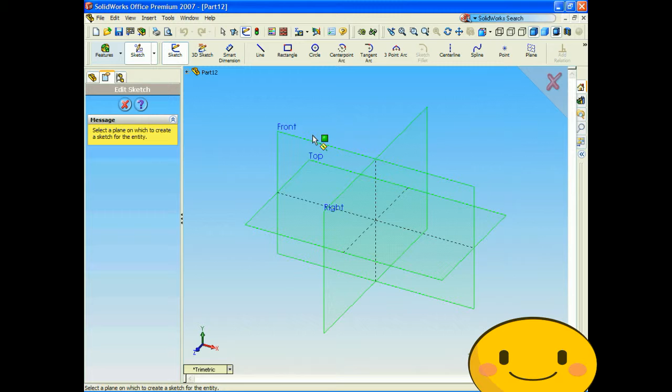To start off, let's click Sketch, click Circle, click the front plane. Now click the origin and let's draw a circle and make this 30 millimeters the radius. Click enter, accept it, click OK. Now go into your isometric view

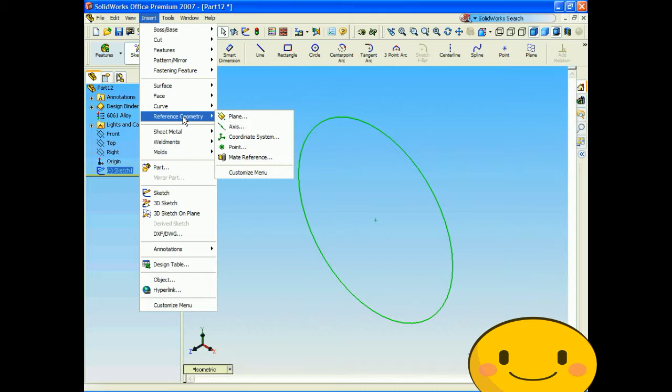and let's insert a plane. Now open up the tree and click the front plane, and let's make this 30 millimeters from the front plane. Click OK.

Click front view, so now we can see the other circle. Click circle, and we can make our next circle with respect to the first one that we've made. Click the origin, and let's make this circle 20 millimeters. Click OK, click OK. Let's go back to our isometric view,

and let's make another plane. Click plane. Now we're going to make it from the first plane that we've made now. So click plane 1, and let's make this one 60 millimeters from plane 1. Click OK, click front view.

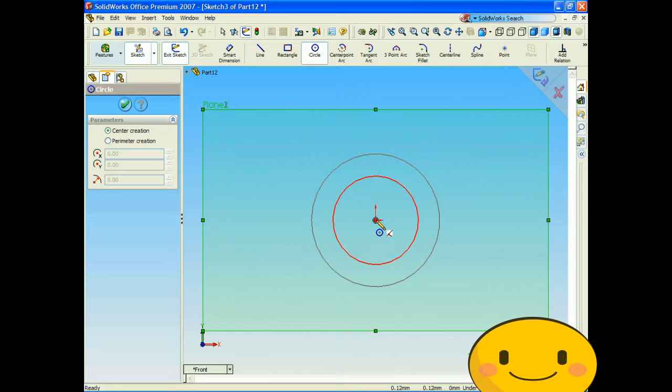Click circle, click the origin, and let's make this circle as big as the first circle that we made. So once the sketch goes red, we are making it as big as that other sketch. Click OK, click OK.

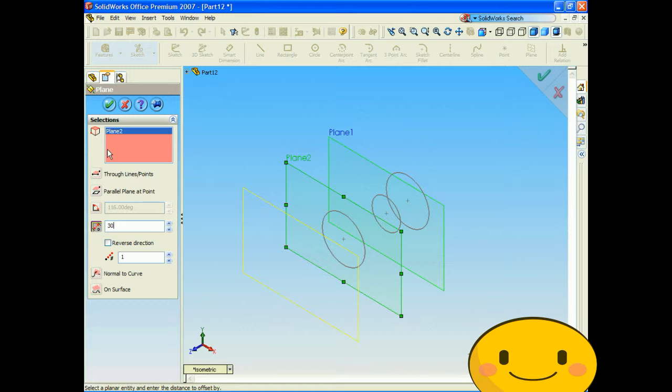Go back to your isometric view, and let's insert another reference geometry. Click plane. Click plane 2. And this one, let's make it 30 millimeters. Click OK.

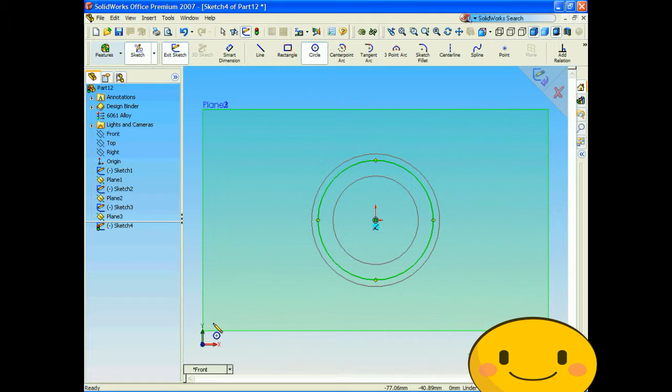Click front view, click circle. Click the origin, and this circle we'll make in between these two, let's make it 27 millimeters. Click enter, click OK. Now back to our isometric view.

Insert reference geometry, click plane, click plane 3. And let's make this 50 millimeters. Click OK, click front.

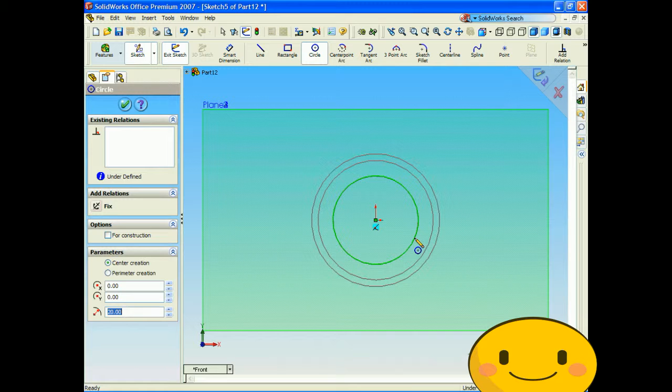Now let's draw this circle from the origin and make it as big as the smallest circle. Click OK. Back to our isometric view.

Insert reference geometry, click plane, click plane 4, and we'll make this one 40 millimeters from plane 4. Click OK, click front view.

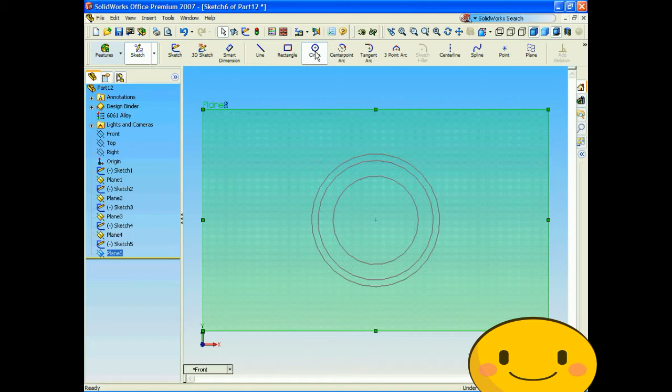Click circle, click the origin, and let's make this 10 millimeters. Click OK, click isometric view.

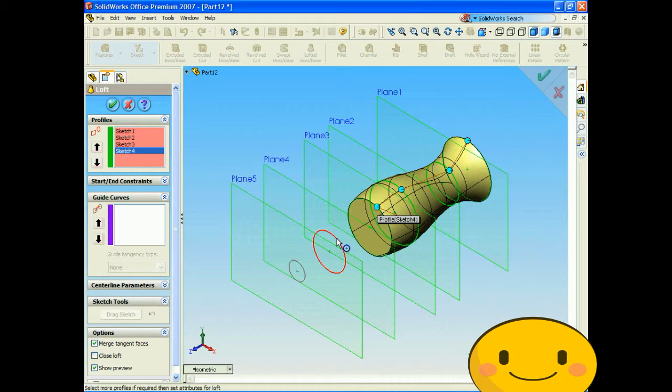And now let's use our lofted base. So click every single sketch that we made, and you'll see the whole part taking shape. Now let's look at our object.

Looks like what we wanted it to be. So let's click OK, and now we've created our little lava lamp. And once again, we can go through all the sketches that are highlighted in red, and we can edit them.

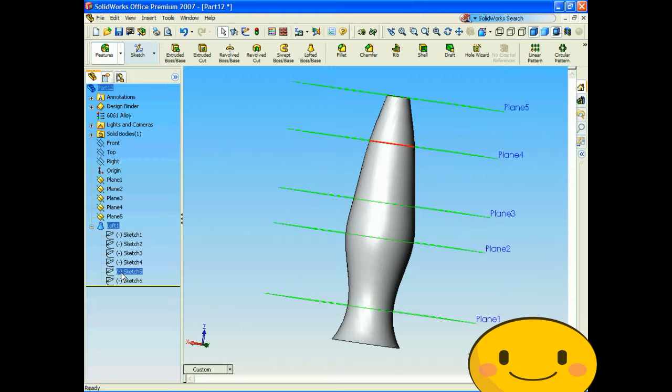So let's say we wanted it to come to more of a point at the top. Let's edit sketch 5 and sketch 6. Right click sketch 5, click edit sketch, click the smart dimensioning tool, and let's make this smaller.

Let's make this 30. Click OK, and let's edit. Click OK, and it rebuilds it.

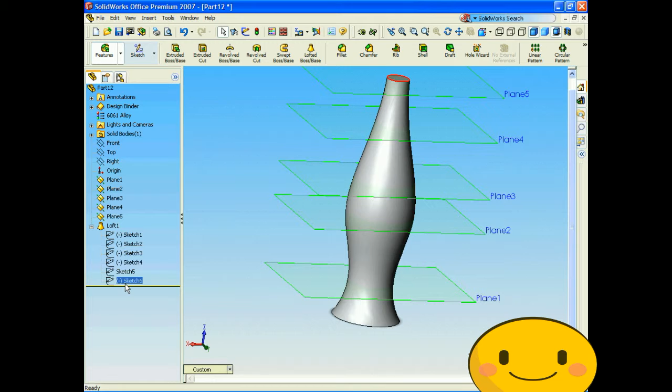And let's edit sketch 6 too, and we'll make it come up to 10. Click OK, and now it rebuilds it, and it comes more to a point.

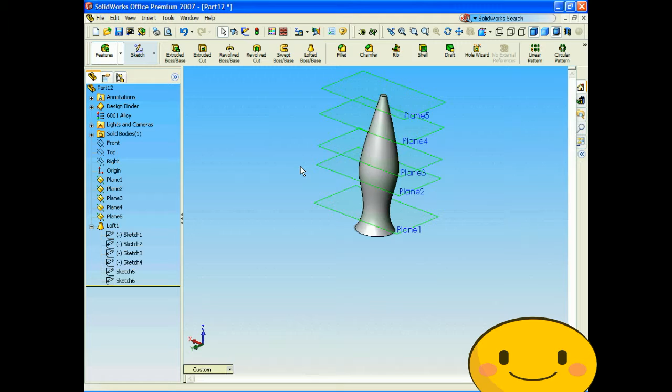Now you can do this with any shape, and as you can see, each layer, it comes up and extrudes through them all. This concludes our tutorial on multiple lofted extruded bases.

This is tutorial number 9, and we will be covering advanced lofted base extruding. To start off, let's open up a part file: click File, click New, click Part, click OK.

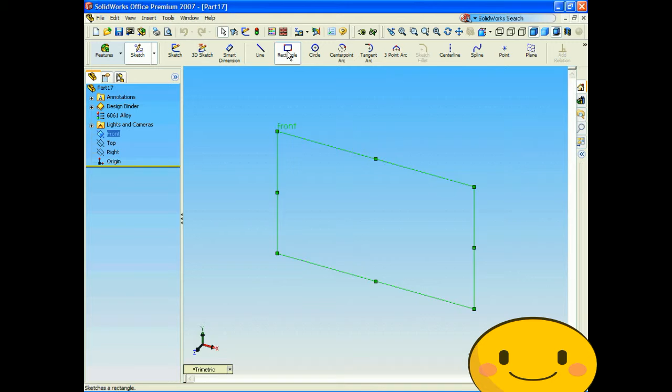Now for advanced loft base extruding, we're going to create multiple sketches like before, but instead of letting it follow its natural curve when we extrude, we're going to impose a curve onto the sketches. To start off, let's click the front plane, click sketch, click rectangle, and let's draw a square in the top left hand corner.

Click OK. Now let's insert a reference plane: click reference geometry, click plane, open up the tree, click front plane, and we'll make this 200 millimeters away.

Click enter, click OK. And on this one, let's draw another rectangle in the bottom right hand corner, one that's more skinnier. Click OK, and we'll insert another reference plane.

Click plane 1, and we'll make this one 200 millimeters away also. Click OK, and let's sketch a square in the middle. Click OK.

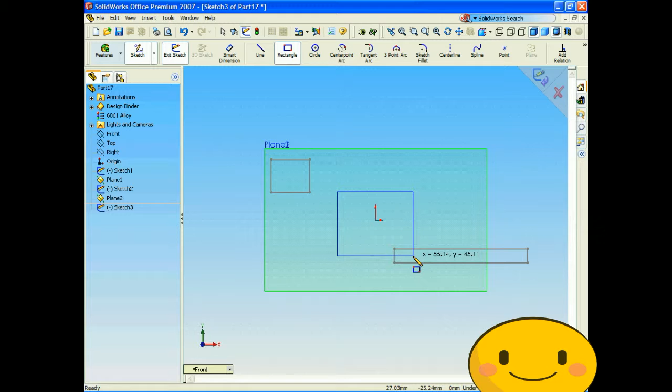And let's insert our last plane. Click reference geometry, click plane 2, and we'll make this one 400 millimeters away. Click enter, click OK. And for this square, let's make it enclose all of the 3 sketches that we've already made. Click OK.

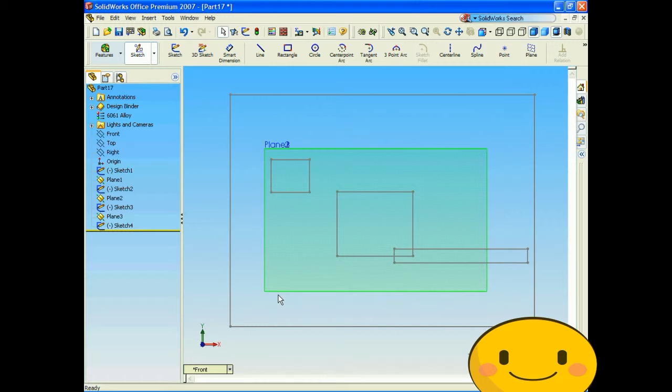Now click isometric view, and we can see the 4 sketches that we've made and how they can come together. Now, for this part of the tutorial, let's click top,

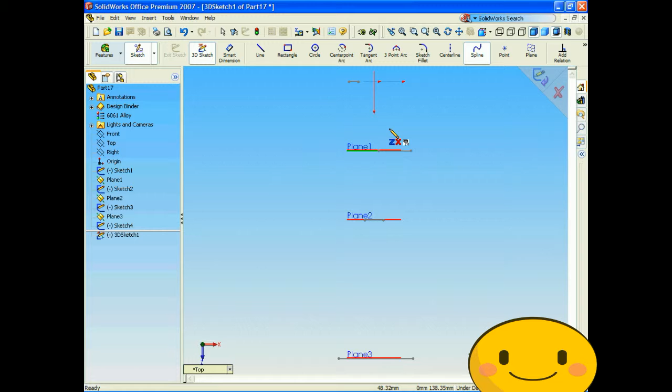and we'll click 3D sketch and click the spline tool. We're going to make now the curve that the extruded loft is going to follow when it goes through these 4 sketches. Naturally, it would go through such as that, but for this tutorial, let's exaggerate it a bit.

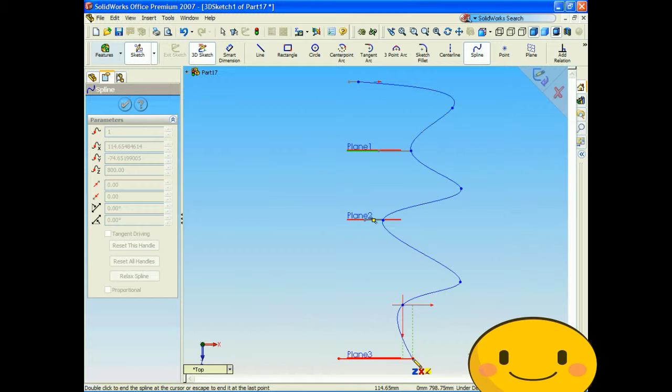Click accept, click isometric view, and you can see this is the path that we're going to make our sketches follow. So let's click feature, click extruded loft, open up the tree, and let's select all of our sketches.

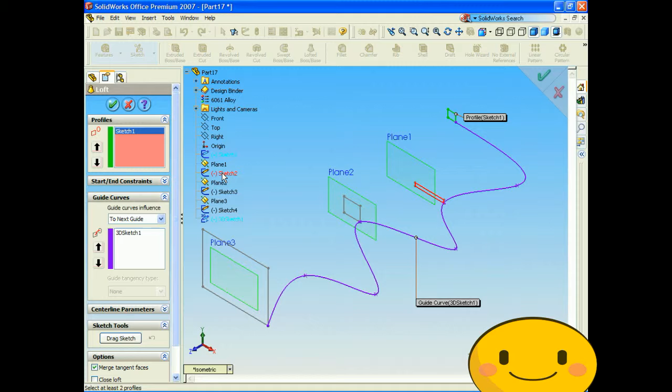Click OK, and there you go. We've created a path for all of our sketches to follow through the extruded loft.

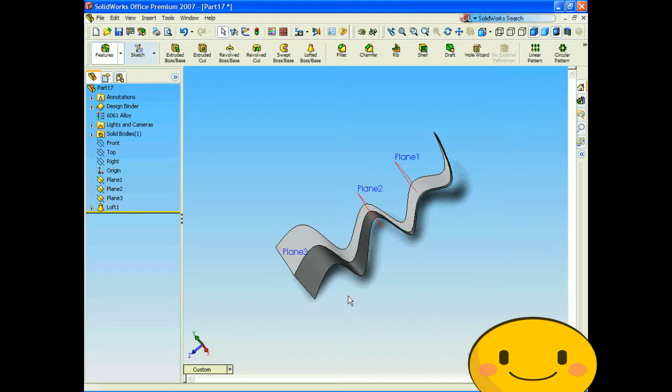Now to see what it would be without the sketch that we put in, let's delete the loft that we just created, and let's do an extruded loft base by using just the sketches. Click OK.

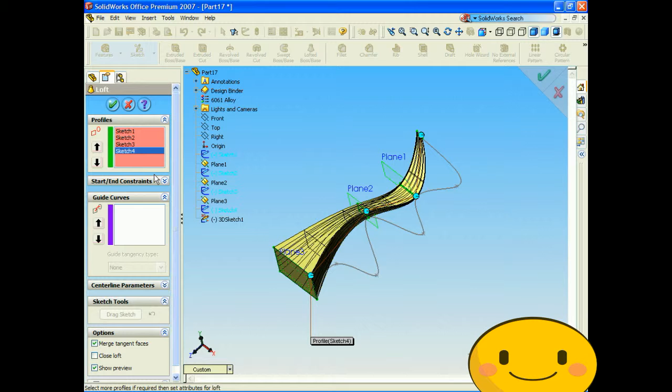And that's the extruded loft that we would have had, and you can see the profile line of where ours was. So you're able to manipulate this lofted tool to whatever specs you want it to be.

Now let's delete this loft, and let's customize this 3D sketch that we made once again. Click Edit Sketch. And every point that you see, you're able to pull in or pull out more and do what you want. So let's play around with these a little bit.

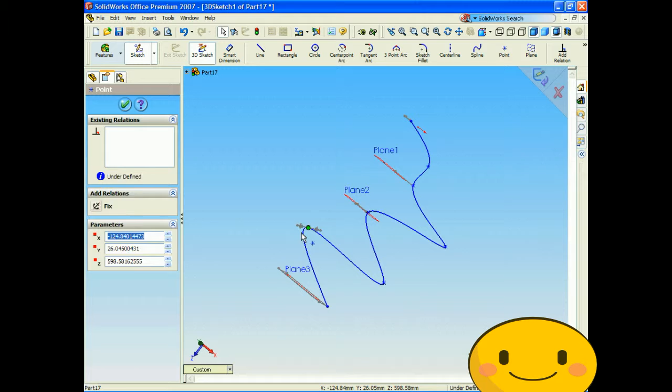Pull this one out more. I'll pull that one in. Now click OK, click isometric.

And let's do the loft again. Let's select all the sketches, and for the guide curve, click the 3D sketch. Click OK.

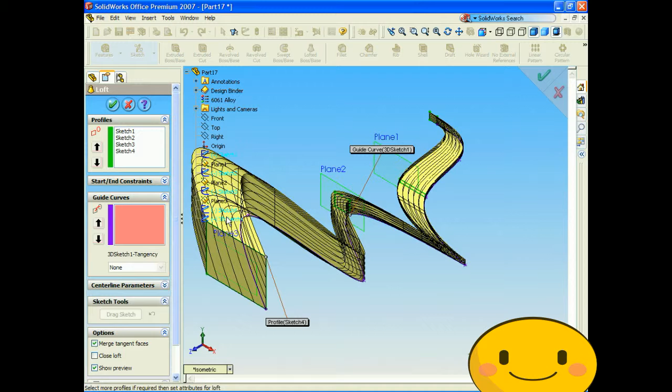And there's our extrude. This concludes our tutorial on advanced lofted base.